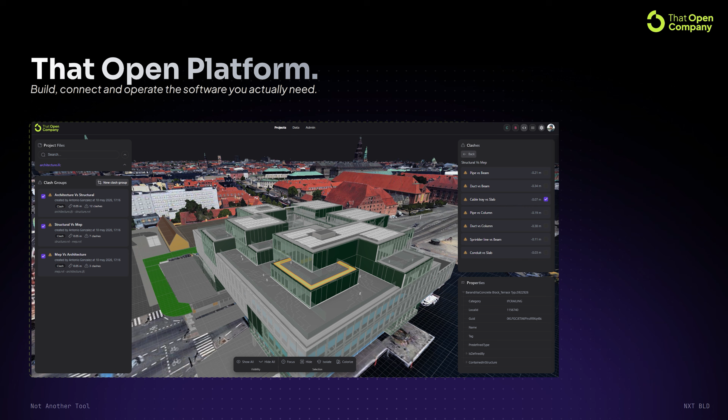So we haven't made another BIM tool. We have made a BIM operating system called That Open Platform. And That Open Platform is basically a place where you can build applications that adapt to how you work, connect them to your projects, and operate everything together.

Let me show you what this means exactly with 4 different examples. In That Open Platform, you can create any software, any BIM solution, and it is very easy because That Open Platform basically gives you all the things that are hard about software.

It gives you the BIM foundation, the cloud infrastructure, the security layers, the roles, everything. And of course, you don't have to build everything from scratch because it already comes with a number of pre-made applications. The day we release it, it will come with a CDE, a model checker, and more to come. So let me explain what this small demo is about.

Basically, this is the Open Platform. You see it has a number of projects. I open one, and I see the CDE that comes with the platform. But of course, I need an application to show you what this platform can do. We have a super powerful 3D viewer and everything.

But now I go to my local machine and ask Claude Code - it can be any AI actually - hey, please can you make an application that allows me to demonstrate the capabilities of the platform to the audience? And it will start working on it. As you see, I have all the software locally, so I actually own the software. I can start requesting features, and because it has all the context of all the BIM knowledge we've accumulated over the years, and all the context of the platform, it's very easy and very fast to create something serious.

At some point I want to see the software, so I ask Claude, hey, can you please show it to me? Then I go to the platform, to the local part of the project, and I can see what Claude built. This video is accelerated, but it took like 10 minutes to create something like this.

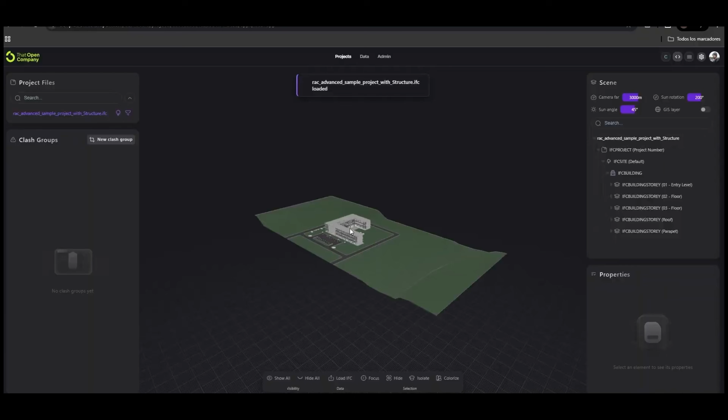And here it is. This application was a model checker, GIS viewer, collaboration tool - you will see in a moment what it does. Here I'm loading a local IFC from my machine. I can select elements, and you see I have beautiful graphics, very efficient, and all the properties and property trees and all the things you expect from many BIM software.

Now, this tool I have locally, of course, but I cannot use it in a real project because in a project you work with other people. So I can basically go and say, can you please publish this in the platform so I can share it? And it will do it.

So now I can go to the project and add a new application, the one I just deployed, and I can version it, keep maintaining it, and of course this is super flexible. You see the application pops up there, beside the CDE, and now anyone in my team can use it with the roles and security and all the things the platform offers.

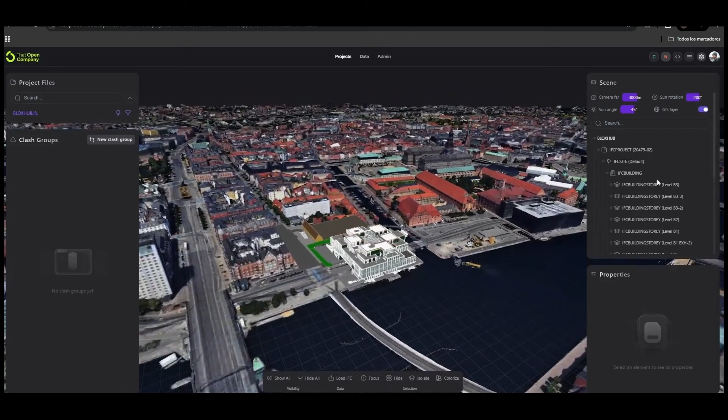One interesting thing is that because everything is connected in the platform, the moment you publish something, it has access to all the data you store in the CDE. So that means, let me go back to where I was, that if I load an IFC, I can load it coming directly from the CDE. This one is a bit bigger, and I have everything - the GIS layers and other things I'll show you in a moment. This was done super fast, and it's deployed and ready to be used in real projects.

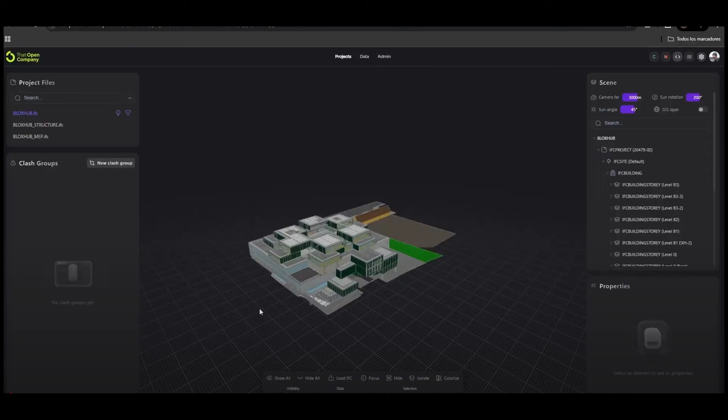The second thing you can do in the platform is, because we have full control of what happens, we can set up collaboration workflows. In this specific demo, what I have vibe coded here is: on the left, a list of all the people contributing to the project with a list of contributions, and on the right we have something like Git, with a full list of changes, so you have a perfect trace of who did what when. And you can ask things like, tell me the history of this element, or tell me what this person did this week.

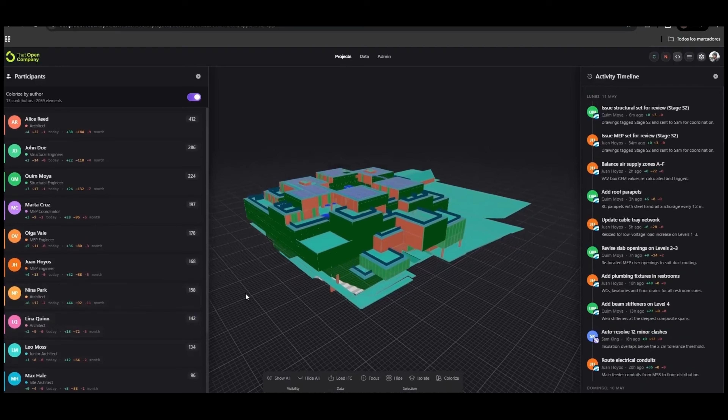And the cool thing is that you can set up collaboration workflows, and yes, you can of course colorize things so you can see who did what. But again, this is vibe coded, so you can do it this way, or any other way you see fit. And then you can go to Revit, which is connected, so you can pretty much set up the same thing you would do in ACC Collaborate if you want, or if you hate ACC Collaborate, you can do other things.

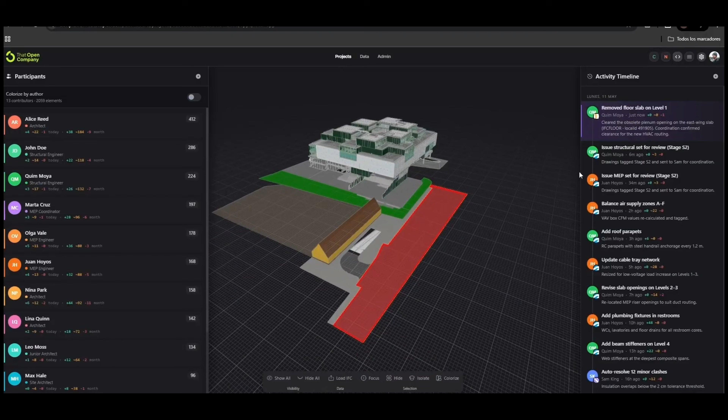You can make any change, you can stream the changes, and the changes pop up directly in the platform, and you can connect your applications with those changes. And I can see what changed, who changed, and I can go back, I can go forth, I can do anything I want, because in the end of the day, everything is just data and logic.

Of course, that means that if you have multiple instances of Revit connected to the platform, everyone will see the changes in real time. And yes, you can set up permissions, you can lock elements, you can set up ownership logic, you can do anything you like. So you can just copy what the solution Autodesk proposes or other people propose, or you can come up with your own way of collaborating in your studio.

I'm talking about Revit because Revit is king, at least for now, but Revit is not the only player in the industry. And this thing that I'm showing you actually works with anything that has an open API.

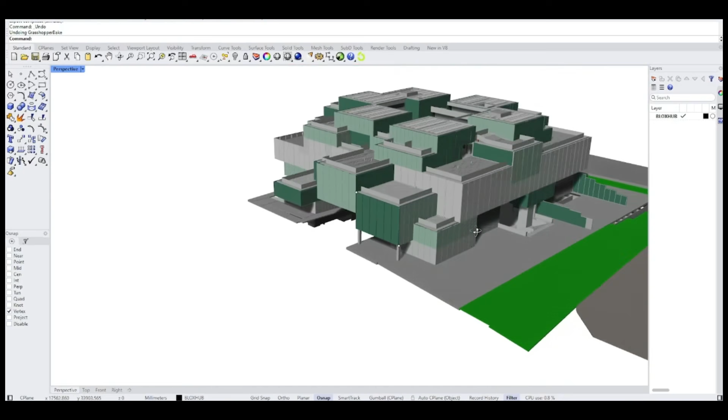That means that you can basically come with Rhino, for example, and you can get the data from the platform, and you can start working in Rhino, and you can stream that data, and that basically works with the logic that you set in the platform.

Here we are modeling something in the facade, and then we stream the change. And the moment the change is streamed, everything is data, so everything plays the same game, and you can do whatever you like with that data.

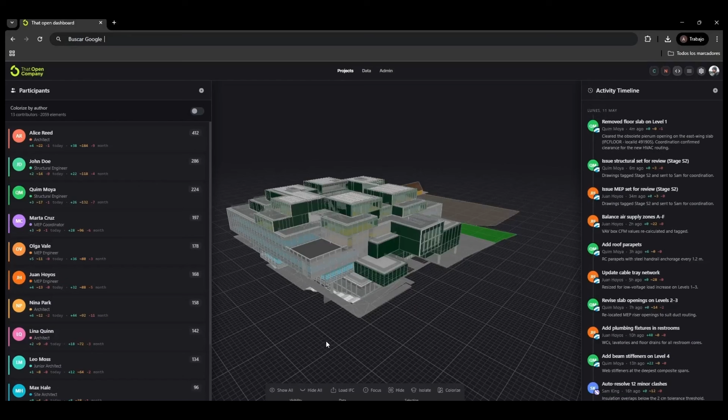Notification, something happened, and you see that the change that was made in Rhino just appears in the same history as the changes made in Revit.

Of course, that means that you can take this data and bring it to other applications like Revit or Blender or ArchiCAD or wherever you work. And because you do this your way, when you do this natively, when you import things back into Revit, you can have your families, your systems, your logic.

So we are not trying to solve interoperability in a global way. We are not trying to invent a language that everyone speaks because we think that doesn't work. What we're doing is giving you the technology and tools that allow you to say something like, I have these elements in Rhino and I expect to see these elements in Revit. This is something actually very easy to solve, and something the platform can allow you to vibe code if you want to.

And we're in Revit, and we see the element that we just modeled in Rhino, and here it is. In this case, it's a generic object, but it could be any parametric family that you want.

Of course, this also means that automation becomes trivial, because everything is just data flowing and logic that you set up to tell the platform what you want to do with that data. So that basically means that you can set up things like this.

In this example, I'm going to go to the project, and I'm going to add a cloud clash detector that I also vibe coded. And then I will set up an automation that basically tells the platform whenever a file is updated or uploaded, please run this clash detection.

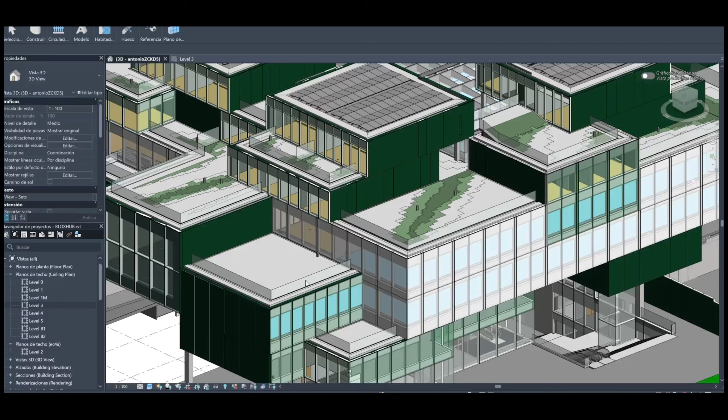So for example, imagine that I go to Revit and I move a random object around, and then I stream the change, and then I get that change into the platform. So the data gets updated, and the automation triggers, and it basically does what I want it to do, which is run the clash detection with the new objects.

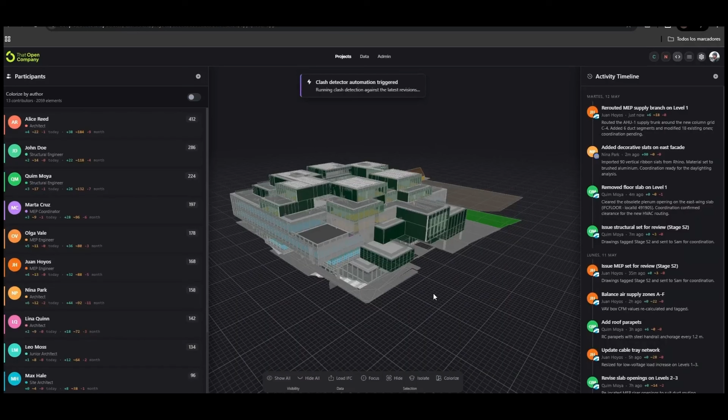In this case, it did detect a clash, so I can see it, and it brings me there, and it can do whatever you like with it. It can automatically solve it, it can notify the people that did it, using the plugin or using standards like BCF. You can do pretty much whatever you like.

Again, we are not telling you how you have to work, we are just giving you the technology so that you do whatever you want with it.

And of course, this also means a change in the economic model. We think that it doesn't make any sense to pay for seats, because if you have 30 licenses and one person doesn't touch the software that month, you still pay for that person.

So in this platform, the payment is for usage, which means that if you have 30 people and only 2 people use the platform intensely that month, and the rest are hanging around doing some things, but just that, you only pay for 2.

And this is how infrastructure costs work, and this is how we think software costs should work. And of course, I think you probably also inferred that from the demos that you saw, but all the software that you create is yours. So that means that if you're not happy with the pricing, you can always take your applications and bring them somewhere else if you want, which is not going to be hard with cloud, to be honest. So no lock-in, crazy, right?

One more thing, because I almost forgot this. All the things that you saw until now were visualizing things that were modeled in other applications and other software. So you might be thinking, okay, this is a platform that allows me to automate and to collaborate and to interoperate. And yes, you can use the platform like that. But we have also developed a modeling API. Yes, it will also be open source. And yes, it already covers all the hardest pieces of making a modeler, including transactions and types and materials and scalability, so that you can view millions of elements at 60 FPS and open them super fast.

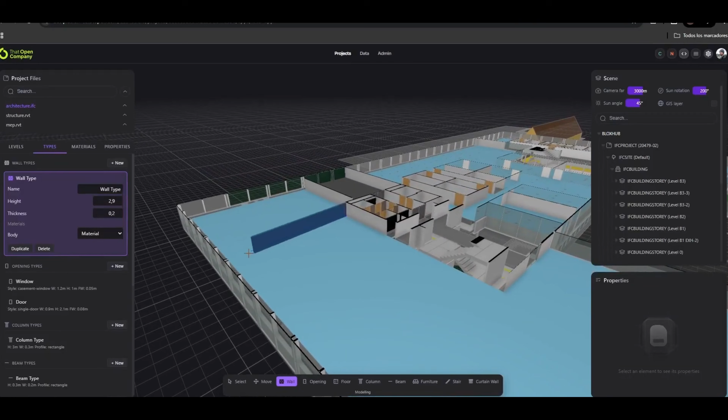And yes, as you see in this small demo, I'm basically using some of the families that I created, because the system allows you to define your own families. So you see we have walls and doors and windows and stairs and curtain walls, and we have types, and we have type properties and instance properties, and you can define any system you like. So you can have a family that is like a whole building system that allows you, if you're McDonald's, for example, and you always build the building the same way, to create a system that actually builds the whole building for you automatically.

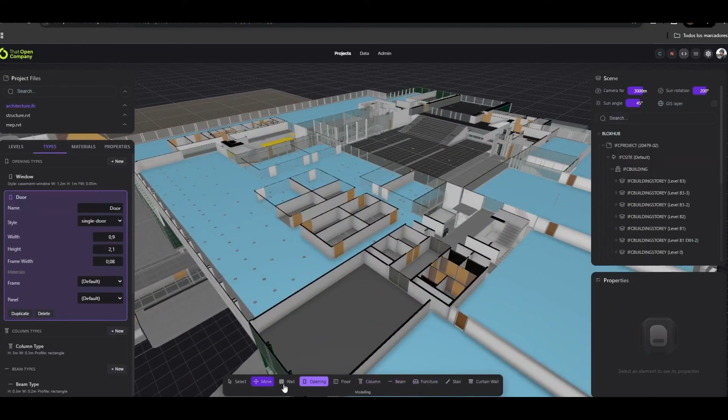So this is, of course, not the new Revit. This is, of course, not the new BIM modeler. This is the system that allows you to define how you want to work and how you want to model. So you don't have to rely on existing modelers if you don't want to. You can just create your own thing. And yes, of course, this is just the first version, so there's still a path ahead of us. But we managed to solve the viewer, and we are pretty sure that we will manage to solve this as well, probably between this year and next year.

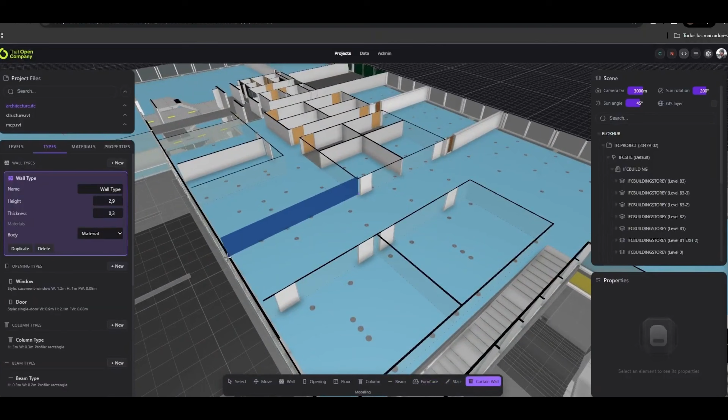We'll see. You can see curtain walls, and yes, sticky snapping and transactions and Control Y, Control Z, saving, loading, all the things. Of course, because with the same data flow that I described before, anything that you model in the platform with the authoring applications that you create, you can also stream back to the authoring applications that you like. So you can have that data back in Revit with your native families and your systems and anything you like, or in Rhino, or in Blender, or in Excel, wherever you like, really. Anything with an open API can connect to this, and everything is modular, so you don't have to ask for permission. You can just build your connector, and it will basically work out of the box. So this is what we have built.

Until now, we have built free and open source libraries, and we will keep doing that. And we won't stop until we open source every single BIM feature out there, and we make it available for anyone to not have to solve the same problems over and over again. We will really break that entry wall. And now with the platform, you can basically use all that open source technology that we have built, and we will keep building, to make something real, to build real workflows, and to stop paying so much money for so much software that tells you how to work and offers you so many features that you don't need, but you still pay for, right?

And of course, we think that the era of software scarcity is ending. That won't happen overnight. Your software stack tomorrow will look a lot like your software stack today. But we are building for what we think is coming, and we think that what's coming is going to be great for the end users in the industry.

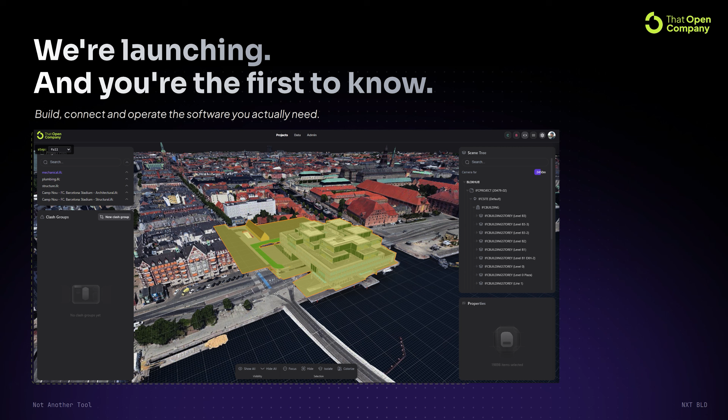Of course, what we are showing you today, we haven't shown this before. This is the first time that we're showing this in public. And we will release this on June 22nd with a unique opportunity to become a founding member, which basically means that the people who get in first will have special conditions that won't repeat in the future. We really want to start working first with the people who know the problem deeply well.